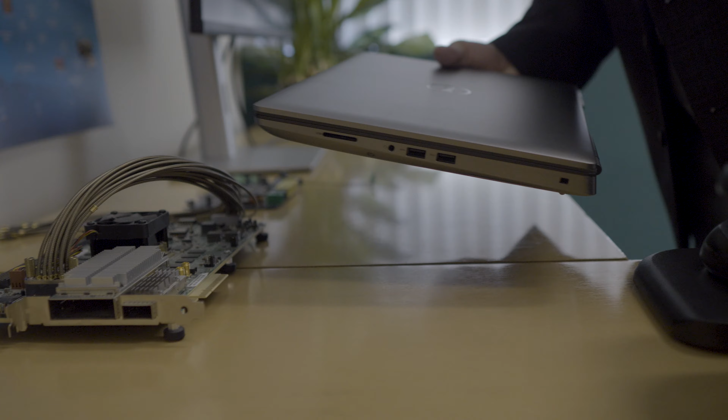Are you ready to learn printed circuit board design? I've been designing PCBs for 30 years, and I'm going to share my secrets with you. I'm Steph Chavez. I'm with Siemens, and I'm a Senior Product Marketing Manager.

So in this first best practice pillar, I'm going to outline how a digitally integrated and optimized multi-domain environment can enable secure, efficient, and concurrent designs across all engineering teams.

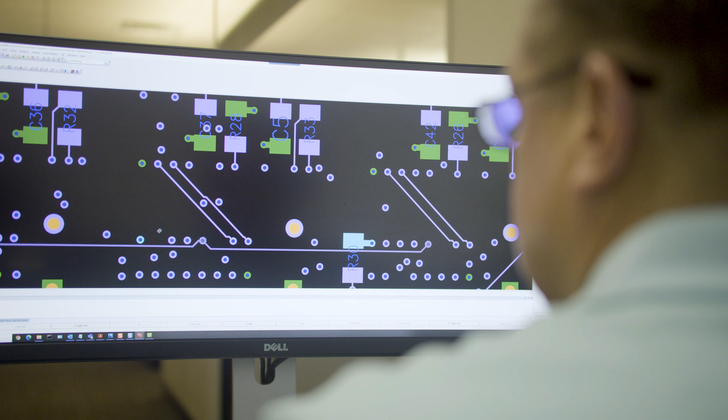So within a digitally integrated and optimized multi-domain environment, all engineering teams, including IC packaging, FPGA, and PCB design within electronics, as well as mechanical and software, can optimize the cost associated with a project, accelerate design time, manage data integrity, and improve the quality of their designs.

Breaking down the barriers between engineering teams and the disciplines, it enables concurrent design seamlessly within the electronics system into the overall product design flow. So that way, companies can get to market quicker with better product, and in turn, it drives increased productivity, it accelerates multidiscipline collaboration, it improves visibility across multidisciplines and the teams, and it supports early visibility on control of cost, resources, and schedules, and definitely managing risks.

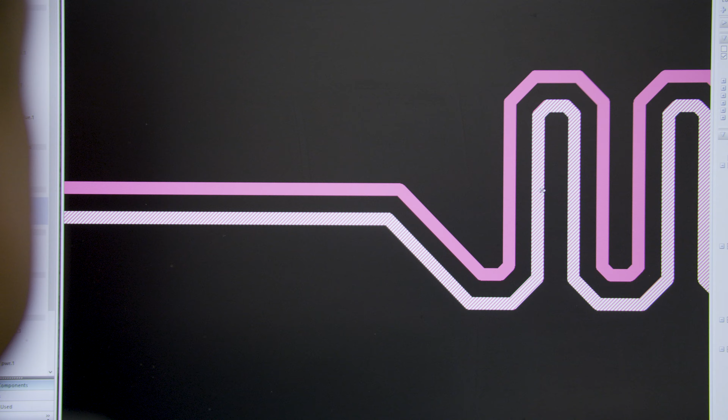So when we think about the best practice pillars, the first one I want to start off with is electronic mechanical co-design. I can tell you from experience, from 3 decades of struggling with the handoff between electrical and mechanical, that it is error prone in the legacy way we've done things.

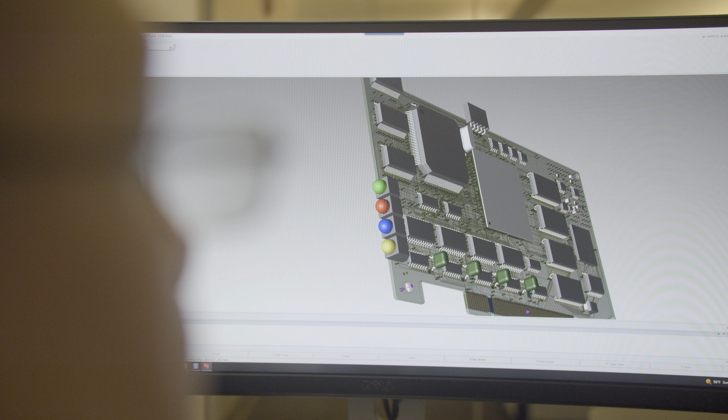The challenge that we typically meet is that the data is usually incomplete, or it has errors when you're handing off. And when we think about how we used to hand off, DXF files was one way, manual emails, or a PDF drawing, or even worse, a handwritten drawing on a napkin. And those are the typical challenges that we're up against.

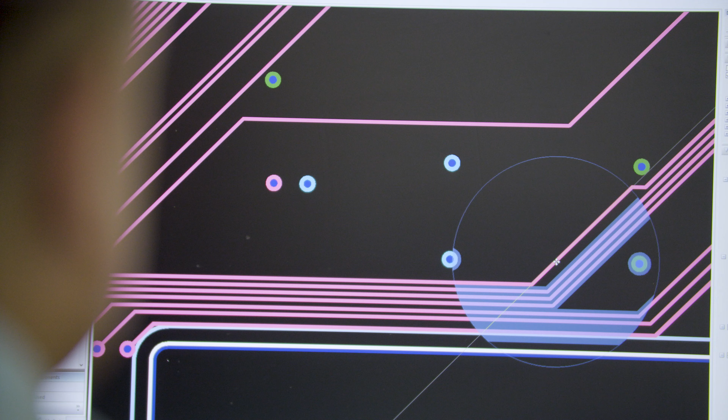Now when we talk about roadblocks that you may run into, one of the biggest roadblocks is organizational resistance to change, and that's an indirect roadblock, but it is a big one. Then we talk about siloed teams and siloed tools that just don't integrate well. Then you have unfamiliar formats in the data that you're handing off.

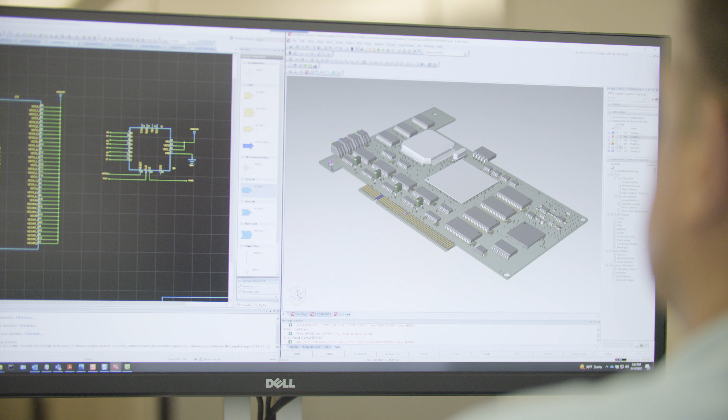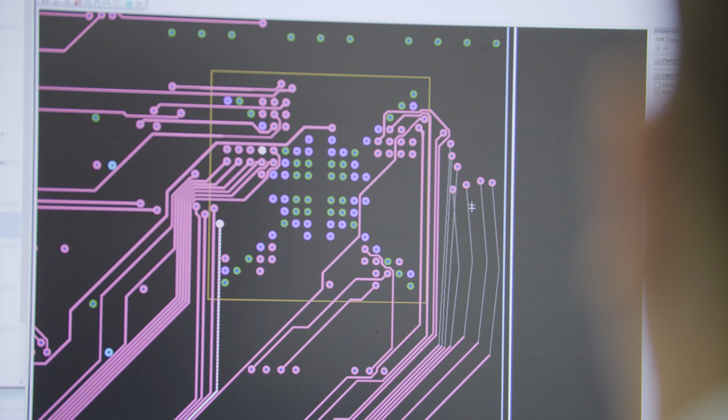And when we talk about best practices, the format that's the latest and greatest right now is the IDX format for MCAD-ECAD collaboration. We should look for methodologies that enable context-based integral collaboration between the domains and the disciplines. Now, the value you're going to get from that is streamlined, integrated collaboration that minimizes the risk of errors during the data exchange.

Now let's take a look at an example of what I'm talking about. An example of where digital integration is important is between electronic and mechanical domains. The handoff between MCAD and ECAD is critical, and it's vital that all the information that comes over from mechanical to electrical is accurate and correct.

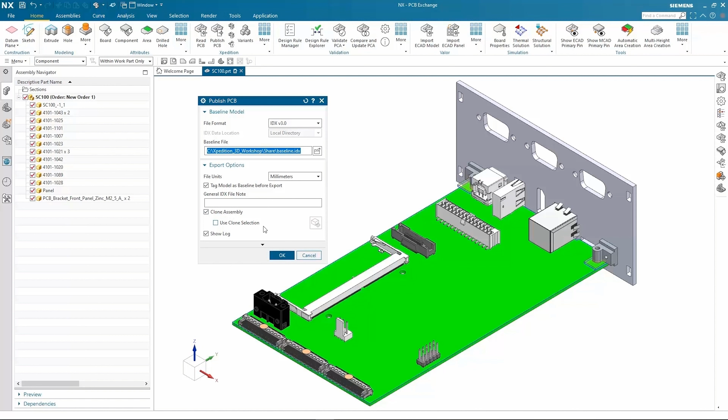When we look at an optimized flow, the MCAD designer might start collaboration after adding data pertinent to the electronic designer to a design, such as board outline and critical component placement like connectors. Other critical features could be mounting holes, tooling holes, keep out zones and keep in zones, and any zones that may have specific height ceiling requirements.

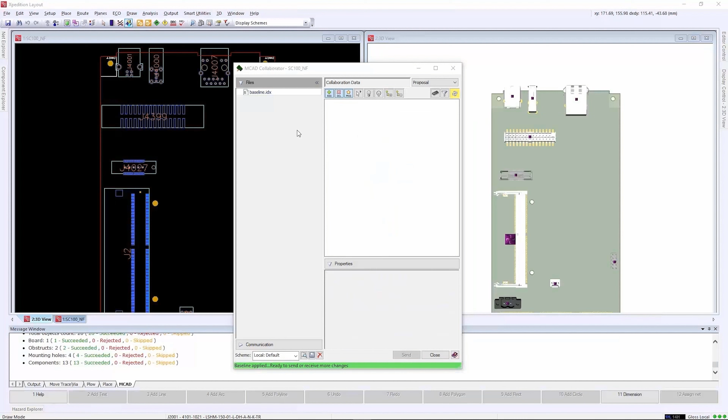This information then needs to be passed to the electronic designer so that it can be considered during the development of the PCB. As part of the process, certain items can be set to be owned by the mechanical designer, which means that these items can only be edited by the mechanical tool. Doing this helps eliminate any accidental changes to items critical to the mechanical aspects of the design that would cause unnecessary rework downstream. Starting collaboration with the electronic designer is as easy as creating a baseline.

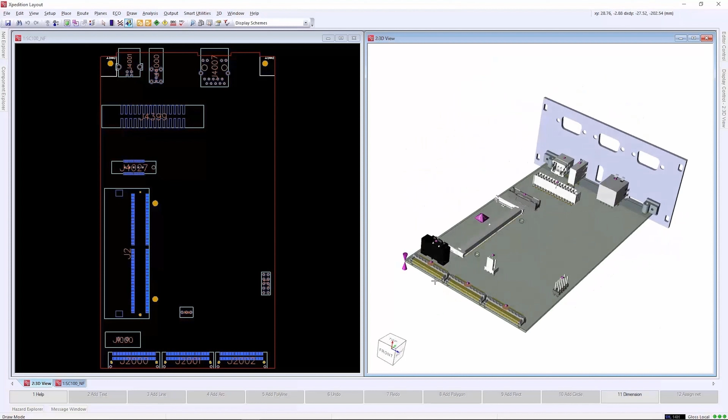With the baseline created, the electronic designer can look at the baseline and preview the information in the baseline file. This is why it's vital that the exchange from MCAD to ECAD be as seamless as possible, and the data that's being passed over is accurate and correct. Items like the board outline, mounting holes, placement instructions, and components all show up in the tree view and allow the designer to make sure that nothing in the file would interfere with any work that may have already been done.

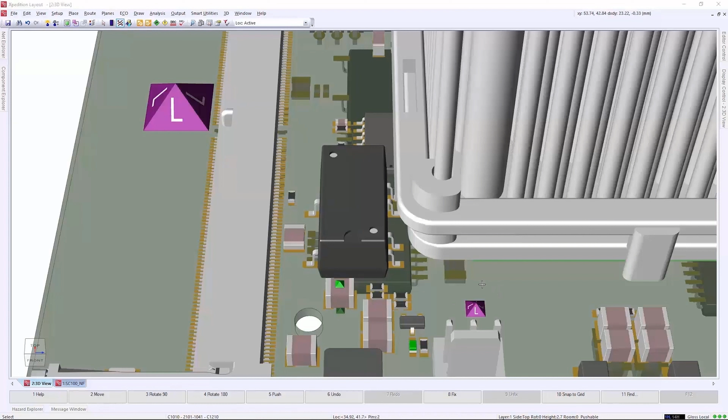Once the baseline is applied to the project, an assembly file can also be imported, which contains the mechanical models and NX assembly. Further changes in the domain can be made by creating proposals, with the domain experts having the ability to either accept or reject the proposed changes.

Another best practice to talk about is design and manufacturing. What I mean by this is the collaboration between design and manufacturing and how they're exchanging data. And it should be bidirectional.

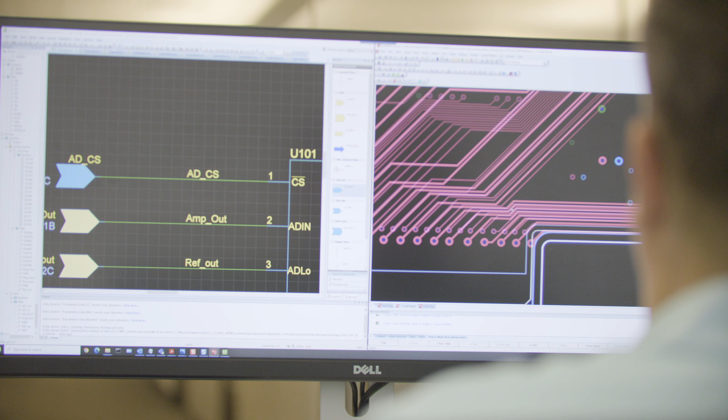In the past, the problems and challenges we've seen are that the data we're handing to manufacturing doesn't address producibility or manufacturability. We throw stuff over the fence, handing poor quality data that isn't optimized, and we end up running into problems, which leads to work stoppages because of technical queries coming back saying we have an issue.

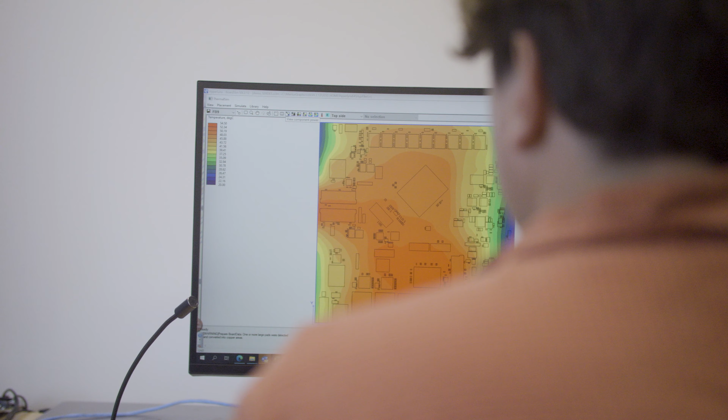A roadblock that feeds into this is competitive pressure from a fab shop or manufacturer to accept the data and make internal changes on their end, tweaking it just enough to move forward with fabrication. They don't provide what they tweaked or adjusted back to engineering so it can be optimized and continuously improved. Instead, they keep producing the same quality of data over and over, which is what happens today in general.

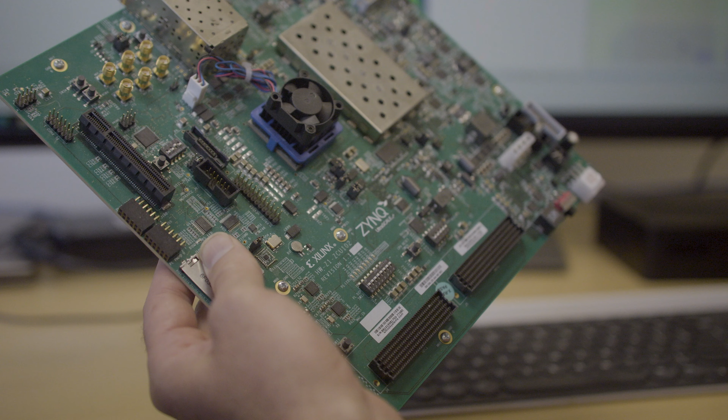Now, when we talk about best practices and what we should be doing, we should optimize the integration between design and manufacturing. How do we do this? We enable lessons learned from manufacturing and make sure that's fed back - that bidirectional loop, or data exchange, that influences the design and enables that feedback loop.

By doing this, we utilize intelligent data formats like ODB++ and IPC-2581. These data formats enable intelligent communication from engineering to manufacturing. The value we gain is an optimized, integrated collaboration that minimizes errors during data exchange and provides a continuous feedback loop of lessons learned.

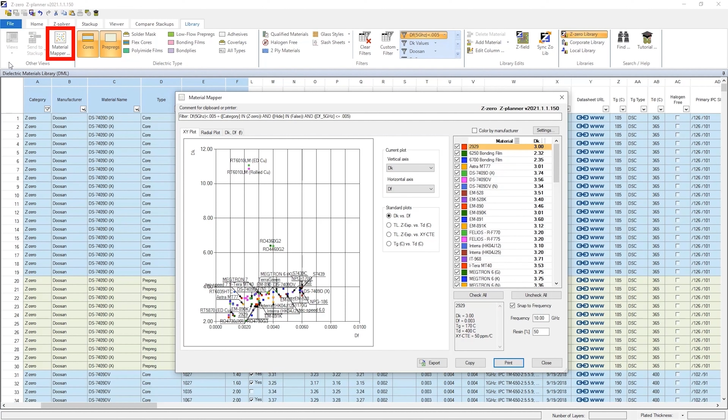Now let's look at an example of design and manufacturing collaboration. The PCB stack-up is the foundation of your PCB design, so it's important to get it right. Detailed stack-up planning early in the initial design process allows you to optimize your stack-up by performing pre-layout signal integrity simulations based on the actual materials your fabricators will use. This is why it's important to get with your fabricator early on in the process.

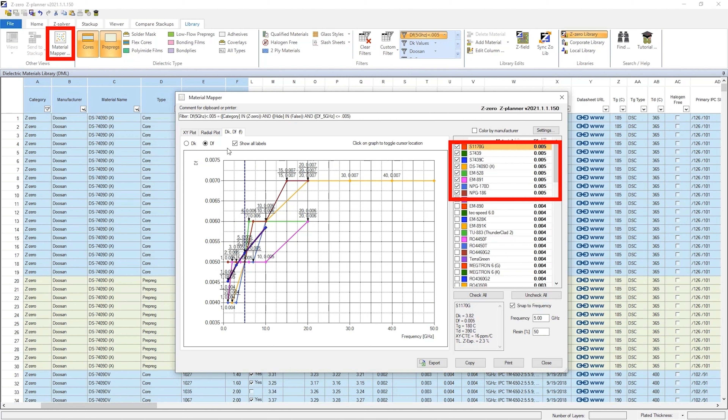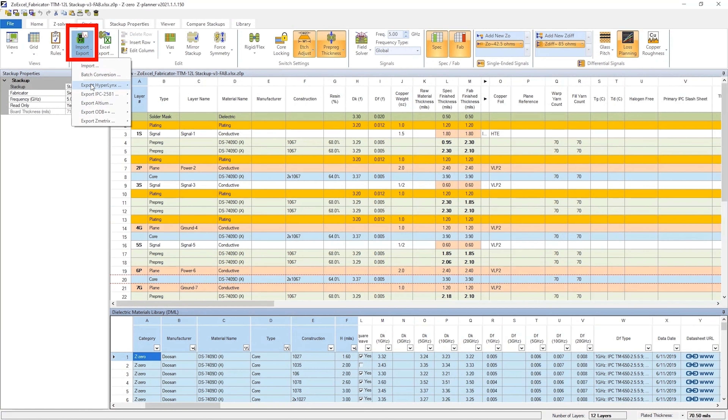This allows for calculating single-ended and differential impedance, as well as insertion loss for microstrip signals, including the ability to add the effects of solder mask and hatch plane. After identifying the materials to be used in the design, you can use this information and start building the stack-up using a wizard, which will walk you through the construction of the new stack-up.

Once complete, the stack-up information can be exported and sent to the fabricator. There you can confirm that everything is exactly how you need it and everything is built the way you want. A digital thread between design and manufacturing increases the potential for downstream success regarding the overall process.

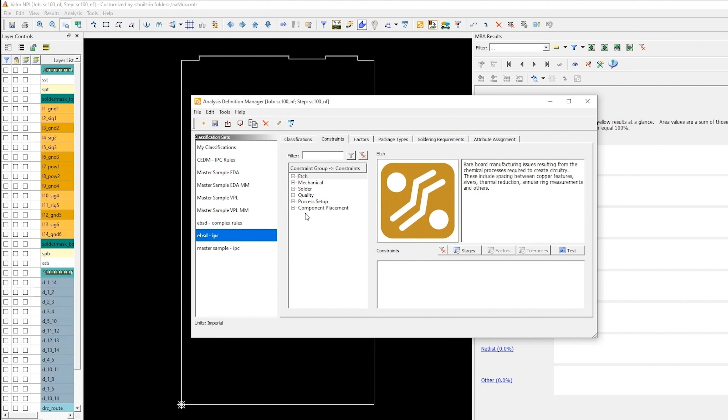It enables teams to minimize the respins that often happen between design and manufacturing. Streamlining the transition to manufacturing requires sharing a complete understanding of the product and enabling early downstream access to the data. Running a manufacturability analysis before sending to your manufacturer allows users to catch issues beforehand, minimizing respins and eliminating undesired changes made to the design by manufacturing. Potential manufacturing issues are easily identified and can be viewed within the tool.

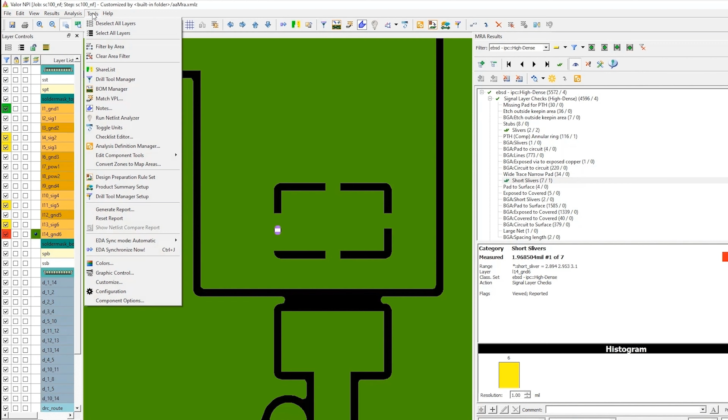A report can also be exported for use in identifying problem areas that need to be addressed in the next revision of the data.

Another best practice of this pillar is library and data management. And what I mean by that is how are you controlling your data, whether it's your library data or your actual IP. Now, I can tell you from experience after 30 years that companies are all over the spectrum. No one's consistent in how they do this. Now, that doesn't mean that they're not doing best practices, because everyone has their own way of what they call success, but there's ways to be better.

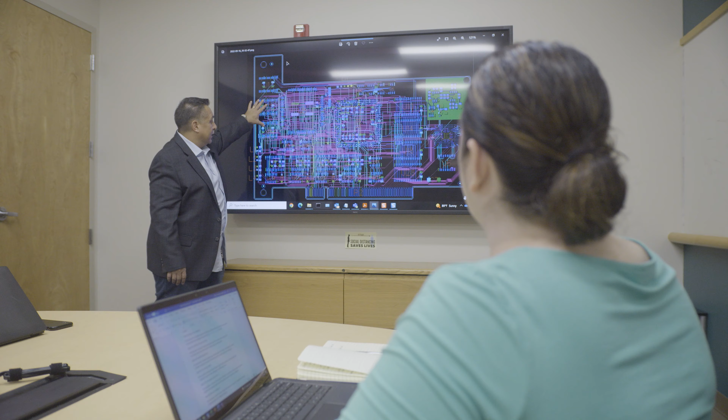And when we think about the typical problems you run into, you would run into ineffective ways of how teams are collaborating, or how you're sharing data, or lack of sharing data. A lot of the roadblocks that we run into is that we have product, organizational, and process complexities, or you have too much overhead to maintain. That's always a big excuse. Or a lot of times you just don't have the experience on how to do that, or you don't have a specialist who knows how to do that within your company.

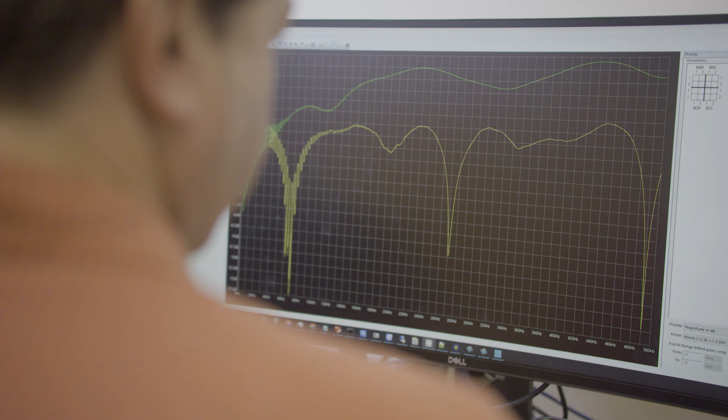Now, when we talk about best practices for this, you want to establish internal guidelines. That way you have an internal set of guidelines and rules on how you're going to do things, so that you're consistent from project to project. And it also gives you a way to look back to see how you can optimize and be better.

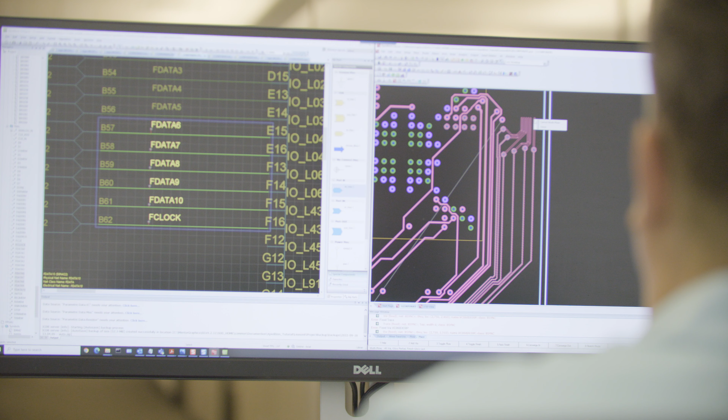You establish your industry standards and how you're absorbing them or how you're utilizing them, because when we talk about different companies, or even nowadays in the global world, you may not speak the same language, but the common language is industry standards. Another way of doing this is your organization and control of your library and your data. You don't have it on a local server or someone's local desktop. Instead, you have it in a PLM system that'll help you optimize for revision control and where used, and it gives everyone better visibility of what's going on.

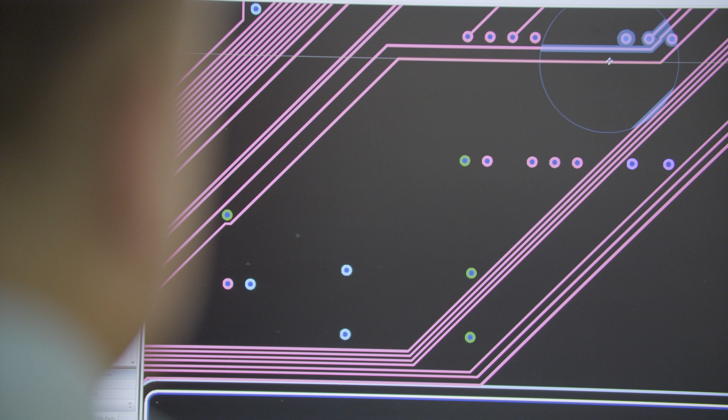So when we talk about what kind of value you're going to get from this, you'll get better control over your libraries. You'll get better use of best parts and best approved circuitry. You utilize hardware IP modules. You can control them better and implement them better. You have instant status, work in progress, and it also removes potential for errors and allows for visibility of where used and other types of information that you may need to know during the work in progress. So now let's take a look at an example of library and data management.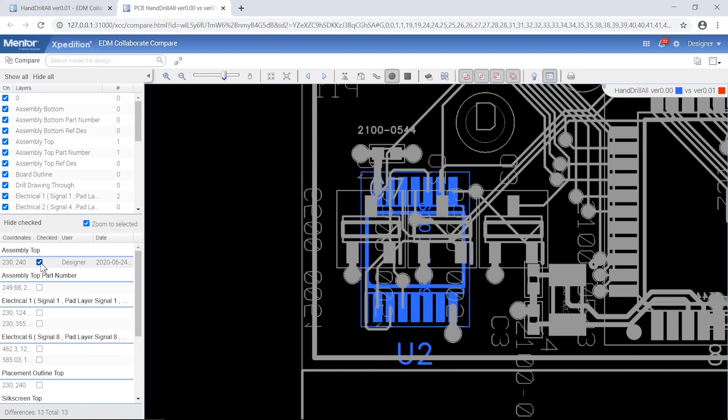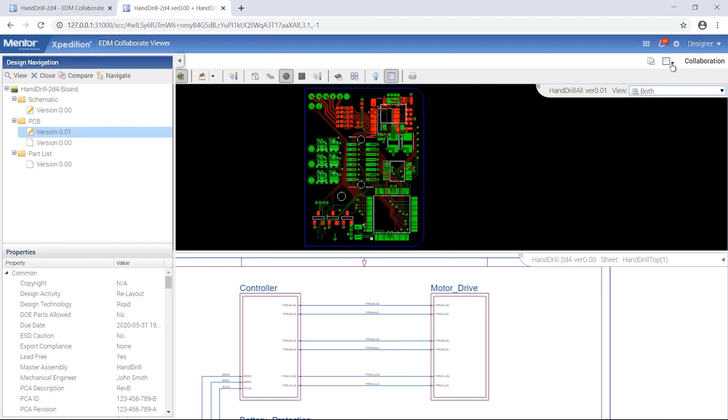Library and data management throughout the design process is essential to maintaining a digital thread throughout the lifecycle of a product. I've heard of and witnessed firsthand how poor library and data management can be extremely costly, lead to schedule overruns, and in a few instances it became catastrophic. So, believe me when I say library and data management is extremely important. Once development has begun, data management is essential for maintaining design information such as design revisions and enabling team collaboration no matter where team members are located. With today's design and manufacturing team members globally located, access to data and the integrity of data is very important.

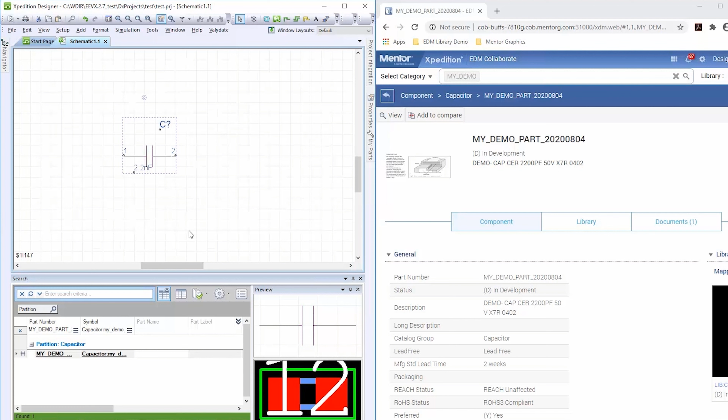The building blocks of any design are contained in the library used to create it. Having a tightly integrated and optimized library environment enables designers to keep track of everything, from 3D models to component data sheets, as well as suitable alternates. It speeds up part identification, selection, usage, and makes it quick and easy to search and instantiate a component into a design. Once a design has reached a milestone, it is time to release the design to a PLM system like Teamcenter. This could be done to simply send the bill of materials to a PLM system for analysis, or it can be a full release that contains all of the manufacturing outputs.